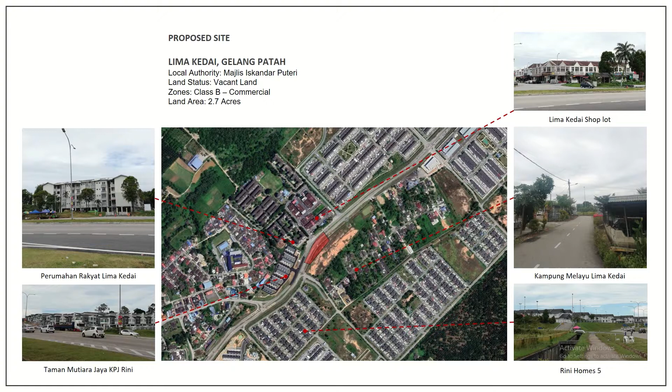I would like to present my proposal on Lima Kedai Vertical Village, the concept of sustainable social housing for low-income earners. Basically, the proposed site is located at Gelang Patah, with the existing context consisting of shop lots and residential areas such as flat houses, terrace houses, and villages.

On the macro study, Gelang Patah had evolved through urban growth where a demographic process occurs and concentration of population within a particular economy and society.

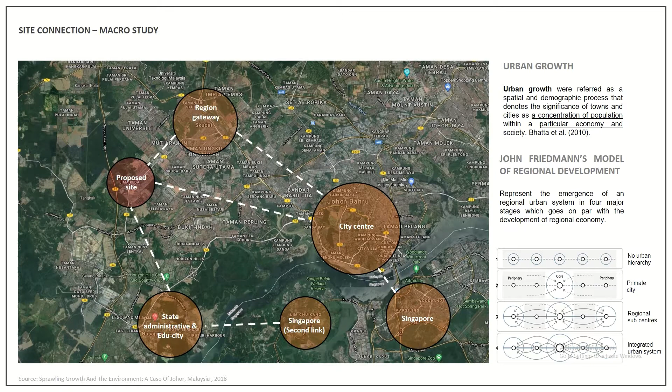From the John Friedmann model of regional development, Gelang Patah has a connection with the city center and is located in the middle of a regional gateway, which is Skudai and the second link to Singapore.

As urban growth occurs, urbanization happens, where we could see changes in social process and relationships. The impact of urbanization leads to uneven distribution of development benefits, both economic and social, which produces the low-income group.

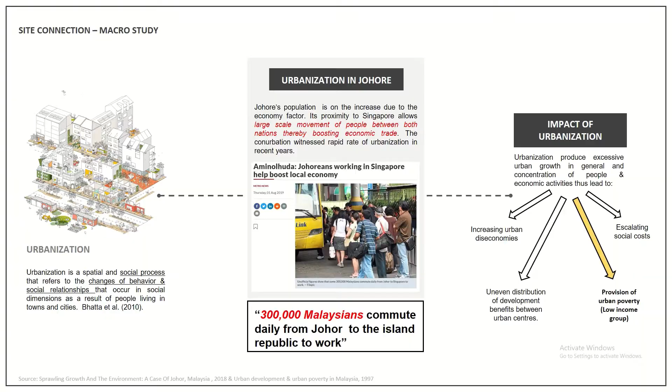Low income groups are classified as Malaysian citizens in the bottom 40% household income range, also known as the B40 group. In Johor, the B40 number has a higher percentage compared to the M40 and T20.

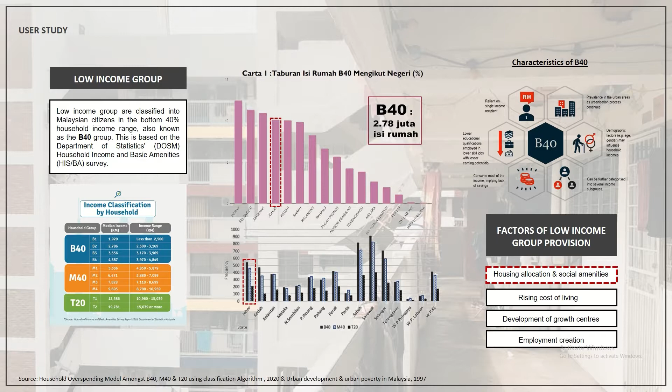B40 also has a tendency toward reliance on single incomes, lower education, and lack of savings, and a key factor for low income groups is the provision of housing allocation and social amenities.

In terms of the relationship between housing and the B40, they tend to have issues with a high degree of commercialization, poor condition of space and place, social fragmentation, and high environmental health risks. These problems are related to housing conditions, affordability, and quality of life.

I had conducted a survey on user perception in social housing. From the results, users were moderately satisfied with the number and size of spaces in the unit and corridor. In terms of supported programs, they suggested business within the housing programs, as well as life skill workshops and other programs.

So the issues consist of the social aspect, where the problem is urban population with social integration and behavior, and for the architectural part, it's social housing integration in the urban setting, and also adequate living places for low income people.

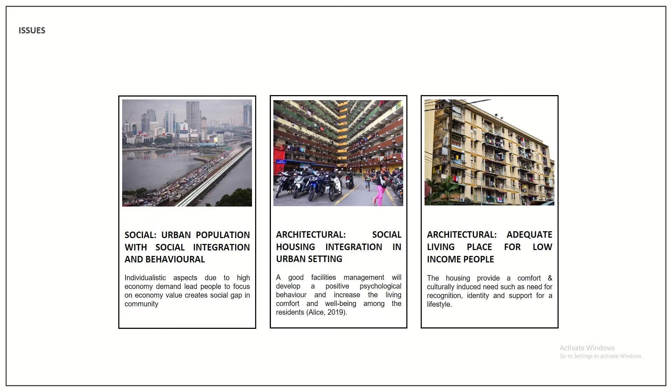So the design aim is to propose a social housing that emphasizes sustainable living in terms of social, environmental, and economic aspects for low income earners in the urban setting.

And there are three design objectives. The first is to propose a social living and space configuration in the housing for enhancing user needs.

The second is to establish a comprehensive environment in the housing area for social interaction and help. And the last is to integrate the building program and scheme with economic value for the low income group.

The client will be SUKJ and the Kerajaan Negeri Johor, because they have an objective to provide housing schemes that are competent for the target group and government policy. The target users will be a single person, a young couple,

and the family, which consists of founding family, growing family, and contracting family.

The strategy for design objective 1 will focus on social behavior and lifestyle. The low income group has a high tendency to increase in household numbers. They live in a hurry and their needs are constantly changing.

Thus, certain issues on privacy could not be well presented in the living context. Regarding Thomas Hojrup's lifestyle theory, it mentions that personal configuration is related to the individual and their spatial need preferences. So the strategy will consider transformable space.

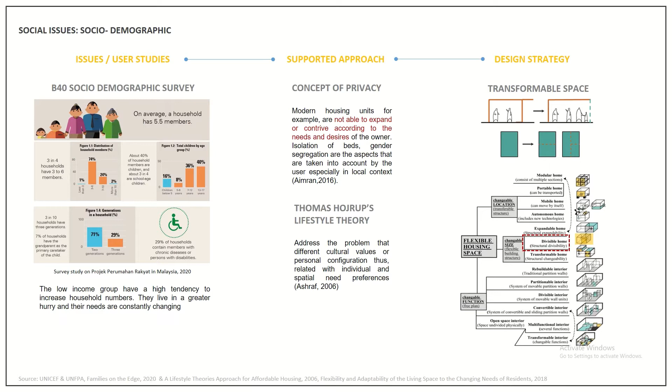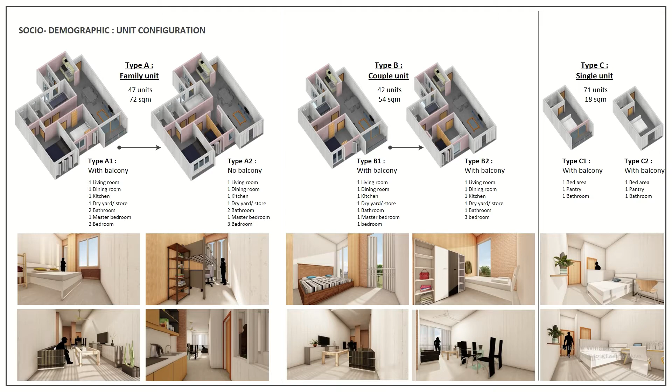For the unit configuration, it will consider transforming the bedroom space from 2 to 3 spaces for the couple unit, and 3 to 4 bedrooms for the family unit, by integrating a folding partition.

For education and employment, B40 has issues with proper education and job opportunities. In conjunction with this problem, social housing could deliver social services and facilities by providing an upskill program.

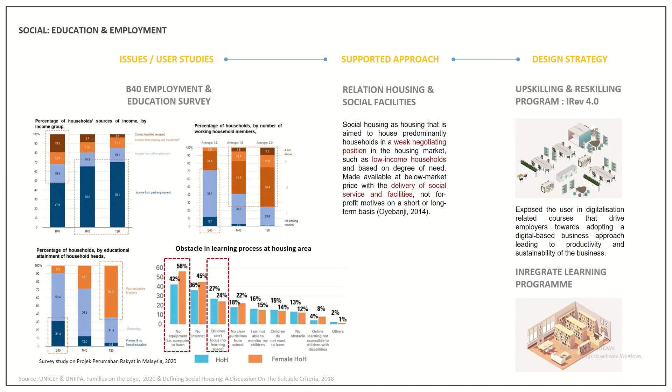The upskill program integrates with the existing upskill program by Gerak Insan Gemilang. It helps aid low income people with life skills and knowledge through end-to-end training.

The program will consider the industrial revolution and basic life needs, and B40 will have easy access to the facilities if the programs are within a walkable scale.

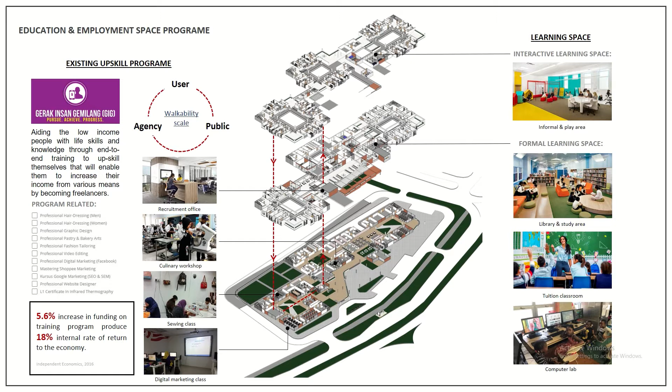The strategy for design objective 2 will focus on the housing context and environment. With current living problems, B40 has issues with well-being, where most of their concerns are on job, education, income, and food.

So social support is really needed to address these current issues and to produce a good quality of life. The living concept could assist by providing good living arrangements, a sense of permeability, and natural surveillance.

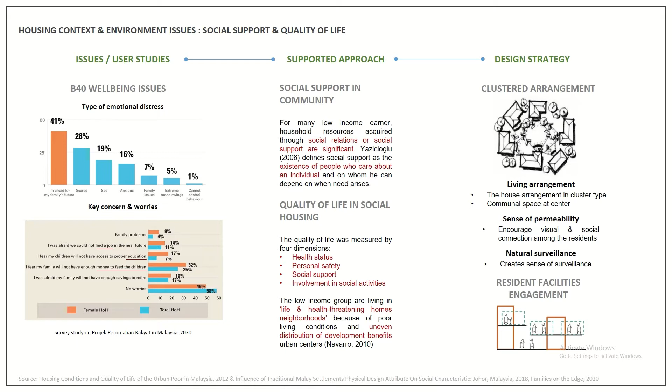From the preliminary visibility study, the cluster arrangement has an impact on social integration.

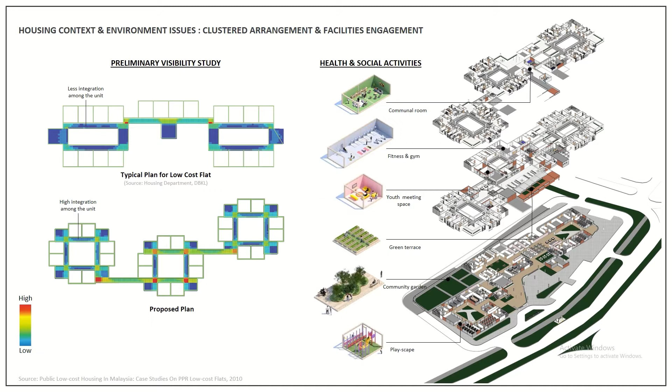The strategy for design objective 3 will focus on the economic aspect. B40 has issues with economic value.

This could not give them good physiological needs in terms of accommodation, food security, and others. The proper social housing could inject economic value into their scheme.

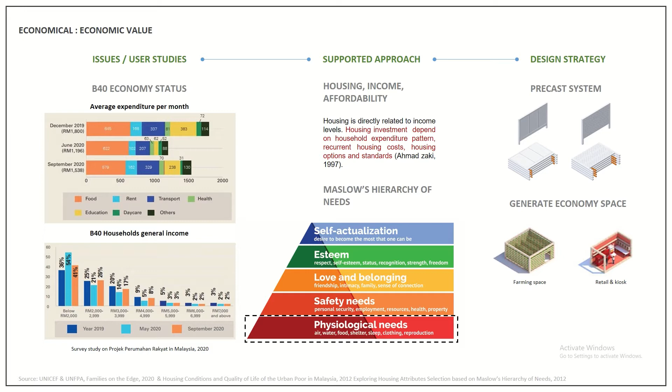The strategy will adopt the precast system, which could reduce cost and help in reducing housing price. Plus, Johor has a high number of precast suppliers, which could help in terms of logistic cost.

For the economic aspect, it consists of retail and kiosk space, or a retail pod, at the ground level to integrate with the public, and at the unit level among the residents.

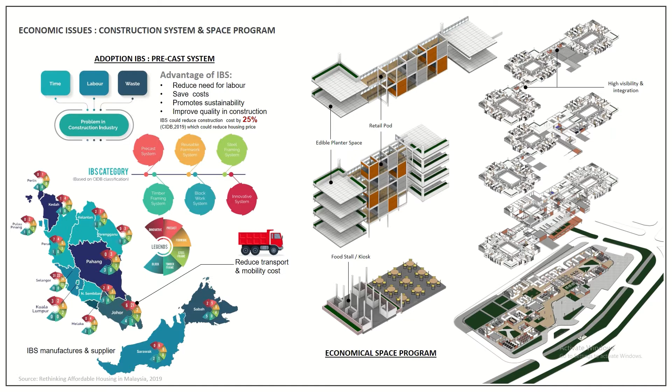For the site planning, it will focus on the integration of public through the buildings to support the ecosystem in the social housing, but also take into consideration the privacy and safety for the residents too.

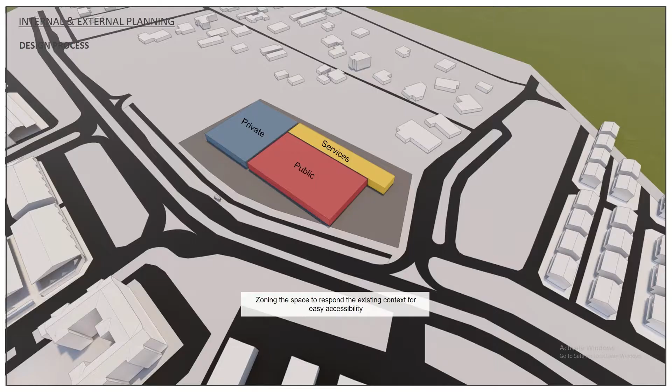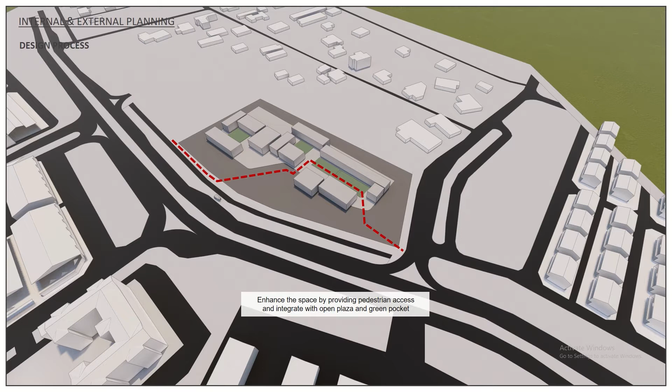So for the design process, we begin by zoning the space to respond to the existing context for easy accessibility. Each zoning integrates with the space program that responds to the external and internal planning. Enhance the space by providing pedestrian access and integrate with the open plaza and also the green pocket.

Provide various unit layouts with cluster arrangements and integrate the central space connection. Link up the units with the green terrace and facility space for social connection. So the zoning and space planning take into consideration public and private activities for a good and livable place in the housing context.

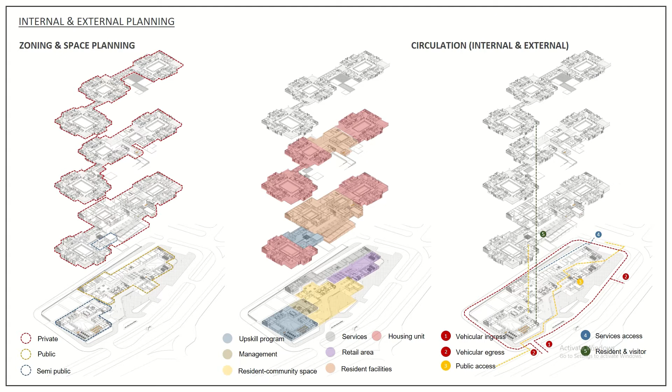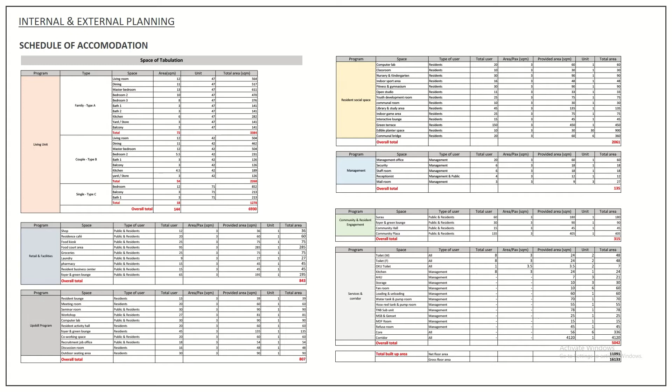Those areas are space accommodations of the building program that consist of living units, retail and facilities, upskilling programs, resident social space, management, community and resident engagement, and also services and corridors. And here are the calculations of general development data to include in the building.

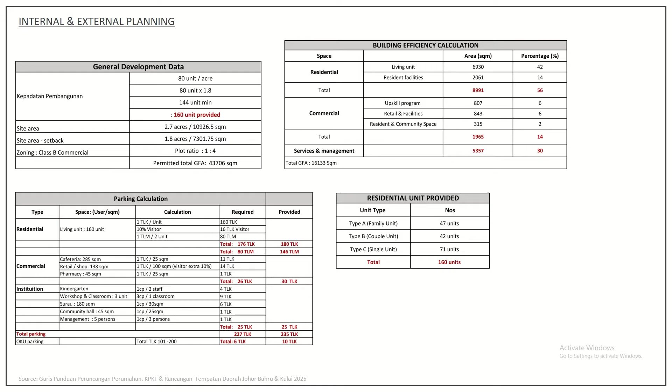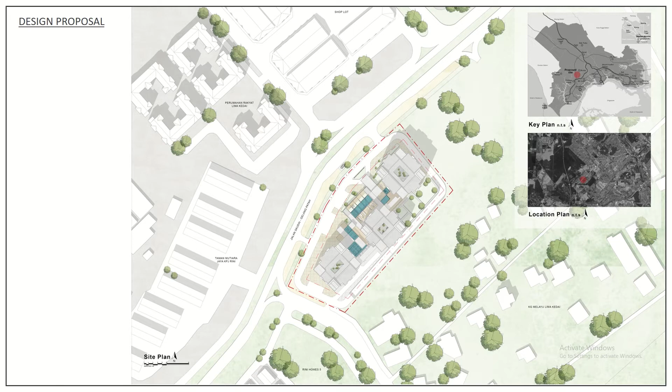So this is the site plan for this proposed design. For the ground floor plan, it consists of public integration, basically to attract the user from the surrounding area.

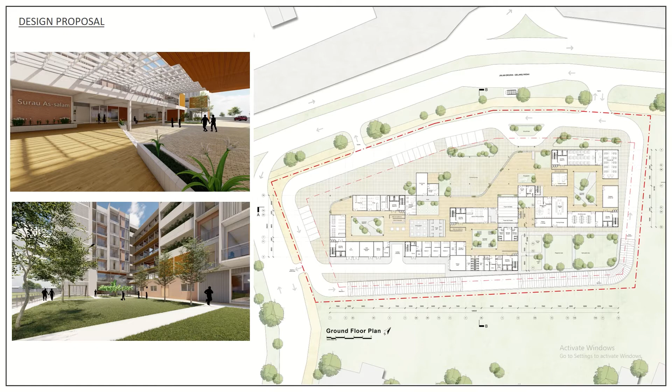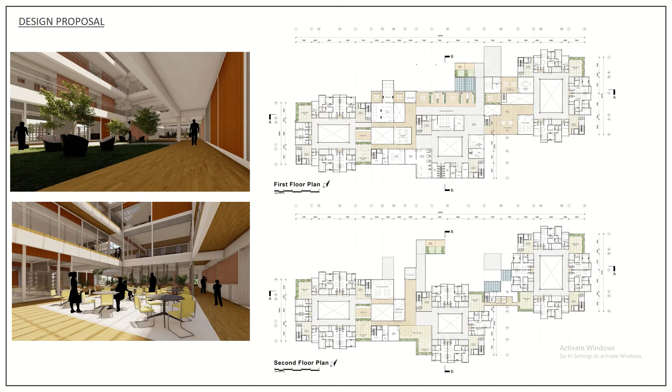So the first and second floor consist of resident activities and facilities with integration of the green terrace that faces the existing neighborhood. So here is the unit arrangement that integrates the clustered organization.

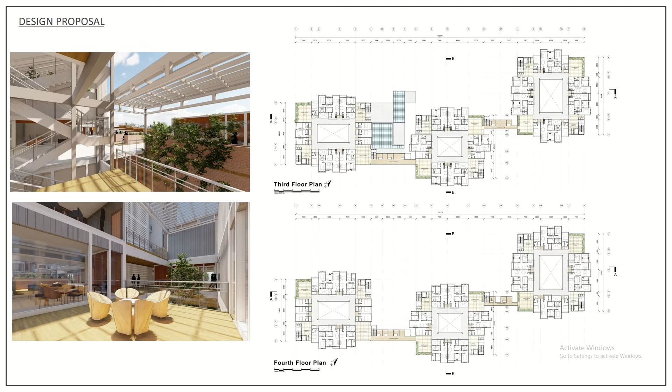Each of the blocks are linked with each other and arranged in clusters to have a good connection and visibility.

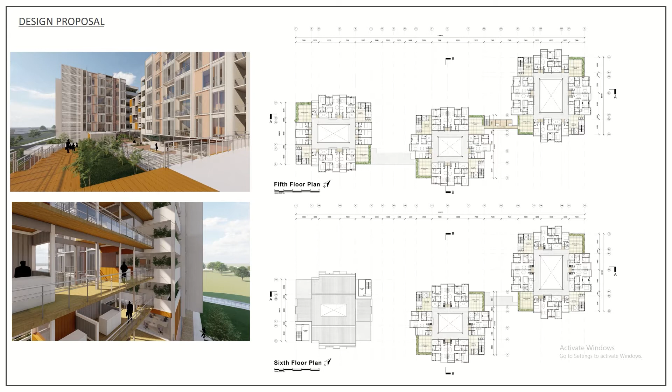So within the cluster arrangement, to have a good connection along the tower itself, we provide the communal bridge that also injects a retail pod for residents to sell their business and stuff.

And each of the bridges also integrates with the edible planter space for social activities and interaction, being a kind of pit stop to have a good communal interaction.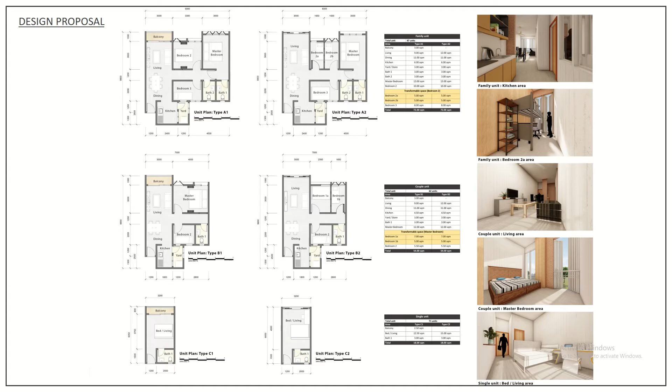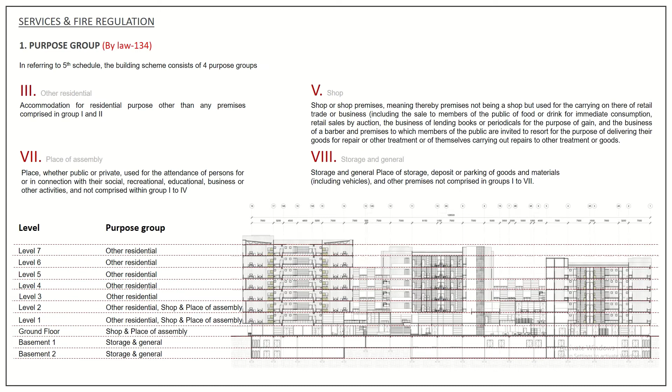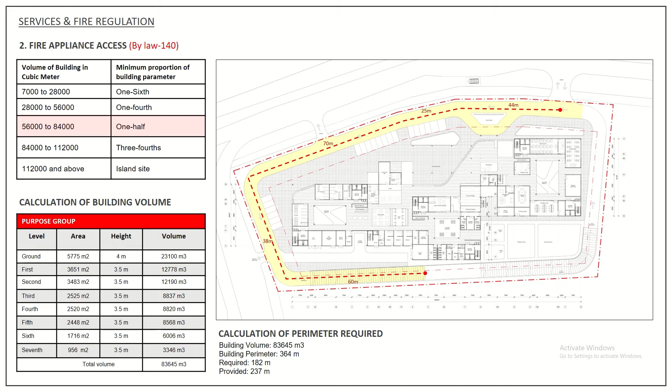For services and fire regulation, the proposed design is involved in four purpose groups. And for the fire appliance, after calculation for the volume, the building requires only one half of the site perimeter. And for fire hydrants, the building only requires about 4 fire hydrants that could cover the distance of a 90 meter limit.

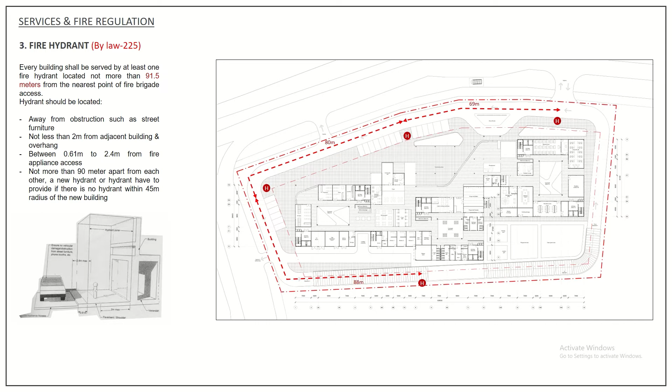For the fire escape, the fire staircase basically covers the entire basement. And for the ground floor, it has direct access through the outside of the building. And from the second floor plan, also 6 fire staircases are applicable to achieve the fire escape calculation.

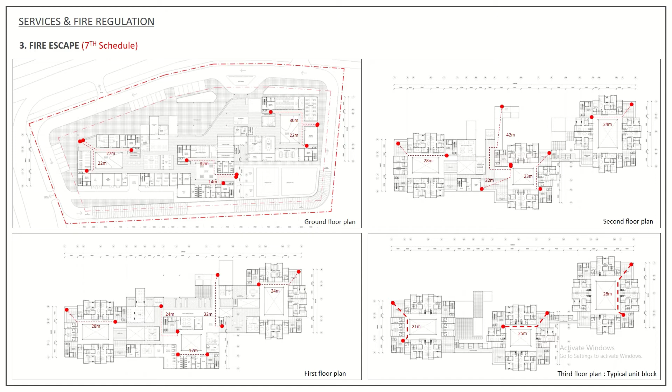The hose reels are sufficiently provided, and the building, after calculation of the height of the topmost floor, only requires a dry riser system.

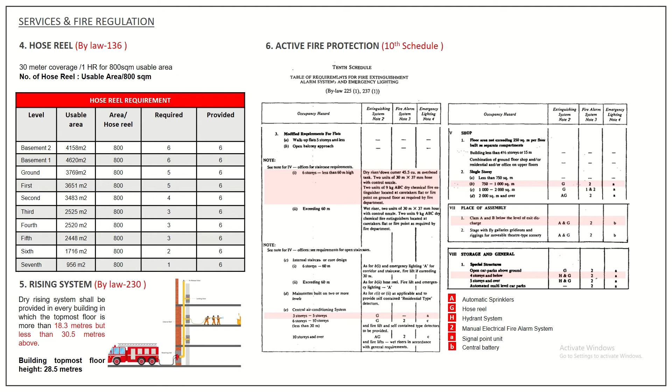And after determining the groups, here are some active fire protection systems in the building. It covers the smoke detector, the fire control room, the water storage tank, and the hose reel tank.

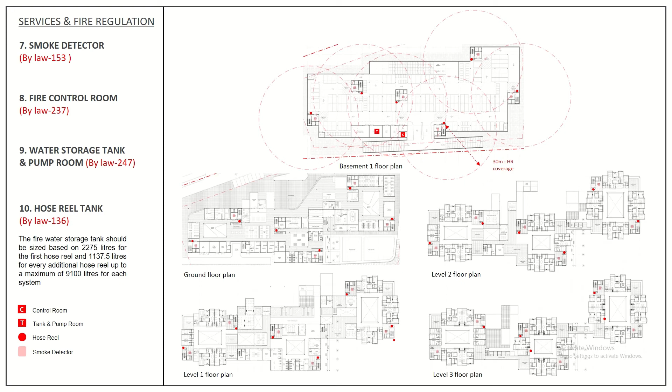And for the water tank calculation, the building requires only 87 water tank modules. And for the air conditioning systems, the spaces required for the central air conditioning system consist of the chiller room, AHU, and cooling tower, integrated with each other facing the services side.

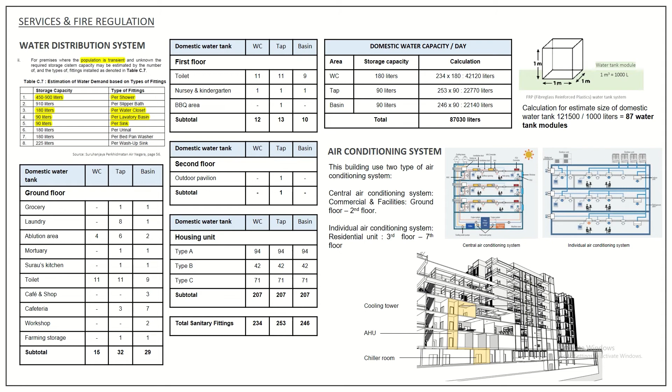And for the construction and structural system, basically it has a precast system that covers the unit and facilities tower, and integrated with the precast system is the modular framing system. They are only a lightweight structure for the link bridge and the facility space.

And for the green terrace, it requires a post and beam construction to integrate with this kind of construction.

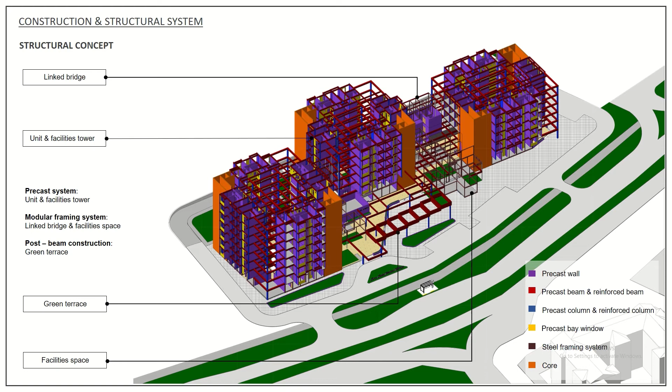So here is the module of how the precast system works for each of the units, and also the modular framing system that is implemented on the facility spaces and also the link bridge.